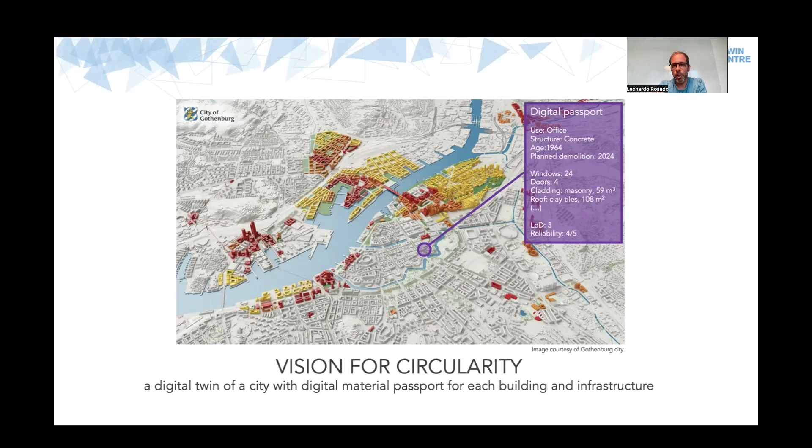We're trying to have a very centered systems perspective approach, so we can really try to go from a theoretical perspective where we look into as much information as we can, and then focus on some use cases, but then come back to this idea of trying to generalize what this vision should look like. So that's what I will try to go through today.

For us to go through that, what we needed first to do was to really try to understand what are the stakeholders involved in this process, what are the interests, and what are the data needs that we should gather in order to fulfill the stakeholders' needs for them to support the reuse and recycling of materials in this existing stock in the built environment in cities. So that was our first approach.

What we did there, we needed to map key variables associated with that and then combine them. We came up with this concept that we needed three main types of variables that are important. One is the phases of the building projects, which include also the end of life. We should also know what stakeholders are involved in which of these phases, and then what types of information they require to really support reuse and recycling in a more practical way.

So what we did then was to really start first by mapping out the project process. Again, nothing too special, but it was important for us to map this out. We combined it also with the way we need to handle materials, because we're talking about material passports and recycling and reuse, so it's quite important to do this.

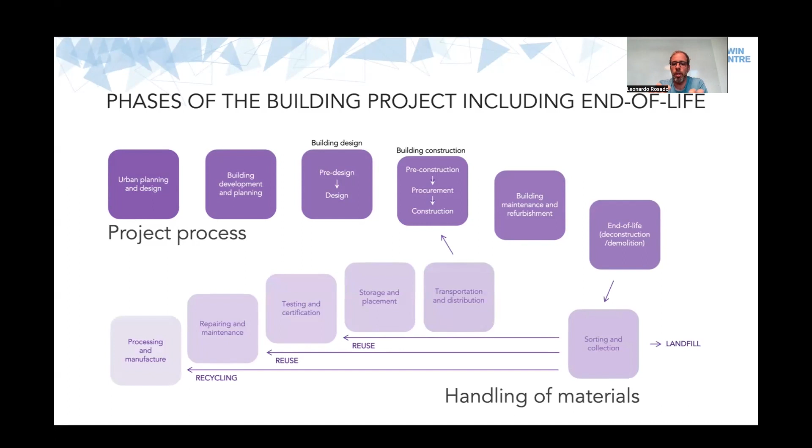We also mapped out the different types of flows and where different types of materials will end up if we reuse them or recycle them, or even if we send them to landfill. This gives an overview of all of this process, because afterwards we look into what kinds of stakeholders are involved in all of this process for recycling and reuse.

We did this very overarching work to really map out all of these connections and combinations between each of them. Once we have that, then we started looking into: okay, so we know the stakeholders, we know the phases, what requirements do they have?

Once we have this information, what we did next was to really try to understand, for each of these requirements, what kind of sub-requirements were needed, and then also tried to map out what type of methods and state-of-the-art approaches exist out there that could provide information to fulfill these requirements.

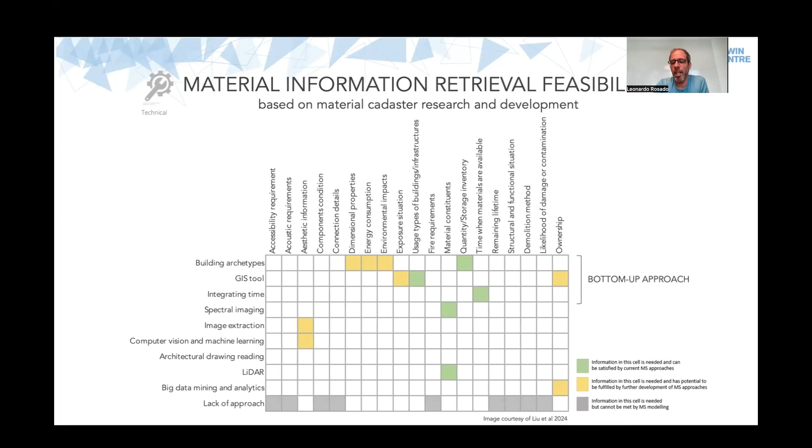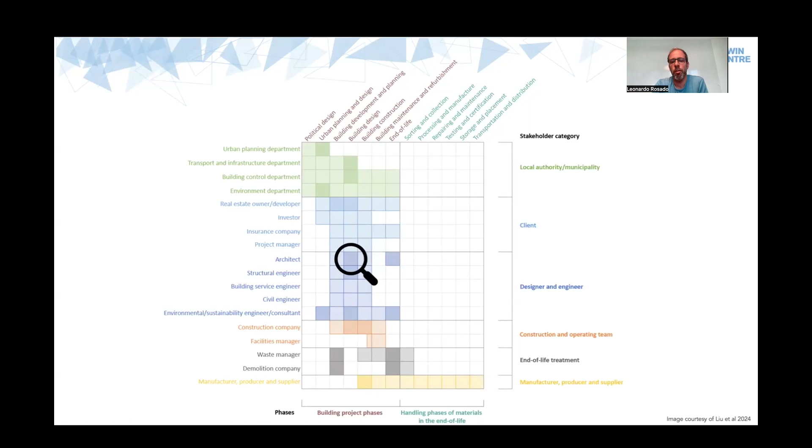So we did all of this and combined it with the previous matrix where we looked into each decision maker to see which information they require at different stages of the process. I'll give you an example of the architect so you can understand in more detail. We looked at the architect in the building design phase and all the requirements, to understand what information they need and what can be satisfied with approaches that exist today, in the near future, or cannot be approached at all.

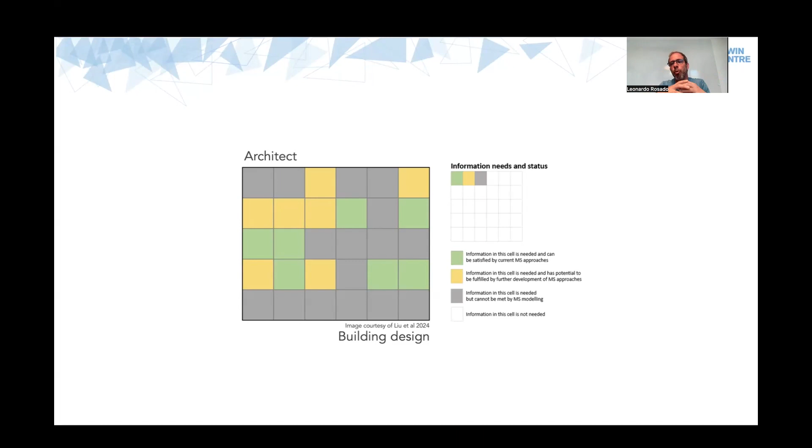So this is our overarching goal and our overarching work, to map out all of this information with a very generic approach to really understand what can be done.

So what we did next was dive into use cases, trying to understand in more practical terms what this means by developing user stories connected specifically to different stakeholders for different phases of the process.

In terms of use cases, we're looking into Gothenburg in Sweden, closely with Framtiden, where their ambition is to identify the supply and demand of recycled building materials and reusable elements from the existing stock, and also provide support to market actors to stimulate this market of reuse and recycling. We also have ongoing processes with Rennes in France and Nijmegen in the Netherlands, and we've lately added Vienna as a fourth case study.

So we are looking into these cases and trying to define what it is that they want in each of them, so we can depart from there.

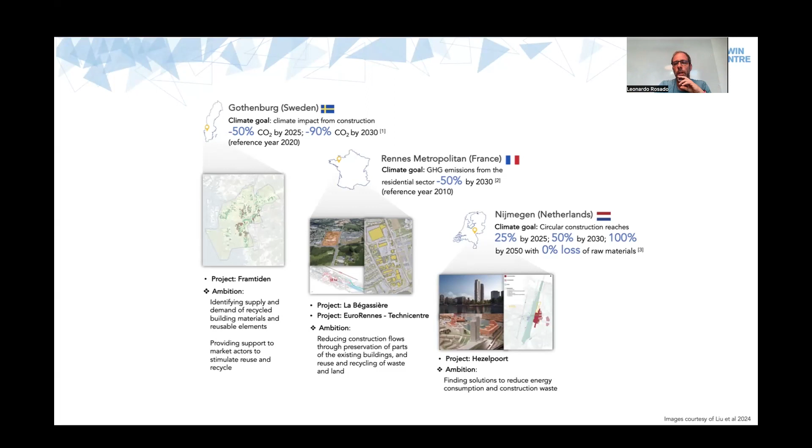Once we know the use case in Gothenburg, we started drafting user stories for different types of users and stakeholders, trying to connect with what they want to do, their responsibilities and tasks in more detail, to see if we can develop a tool useful for their daily practices.

We looked into several of these, specific for Gothenburg. I want to show you the example of the sustainability strategist. We drafted this together with Framtiden to really understand what they want out of the tool.

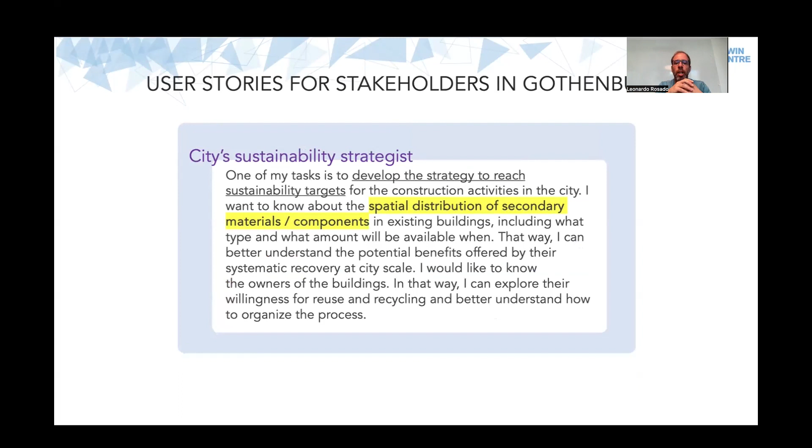Some of the things they were interested in: understanding the spatial distribution of secondary materials and components, knowing what type of components and materials we're talking about, what amount, and when they'll be available, and also who owns the building, so they can better address how to recycle and reuse.

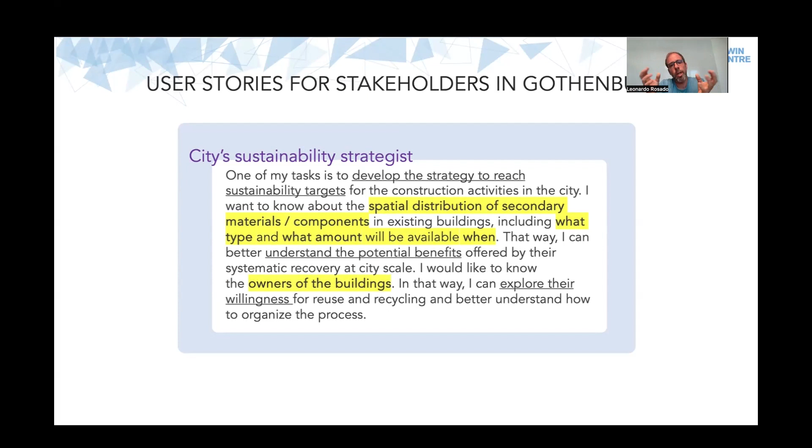So having this use case and these user stories, we can start understanding what we can do to develop a tool that is useful to apply in a practical context, in this case, in Gothenburg.

So what we have done so far in tool development was first to identify what data sources we were going to use in general. Again, this is very connected with resource cadastre information.

What we used for this tool was first to know the material intensity coefficients for building types, different types of buildings, multifamily buildings, single family houses, commercial buildings, industrial, educational, and so on, connected with the different elements in these buildings, the components, and also the materials.

This information we got from previous work at Chalmers by Paula Gontia, where he described this information for different archetypes of buildings across decades of construction in Sweden.

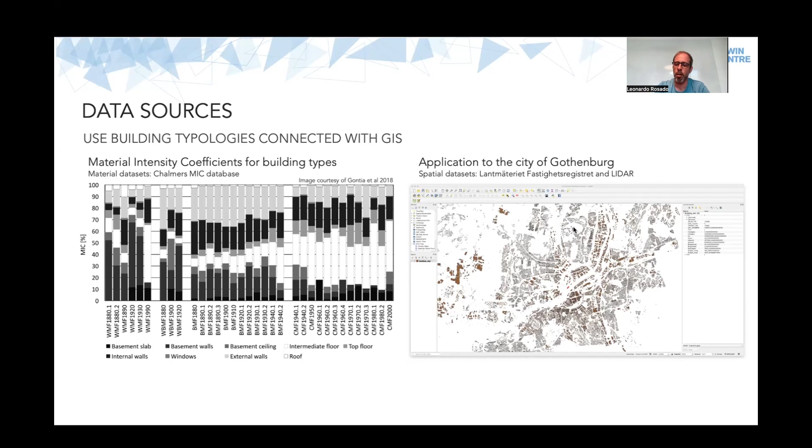Having that information for an average building per square meter of ground floor area, we applied it to the spatial information related to Gothenburg using the Lantmäteriet data and also LiDAR data to get information about the number of floors or the height. So that was the bulk of the information we used.

Then we started preparing the GIS data set. We assigned the types of buildings, the construction decade for each building, and the type of structure—if it's brick, concrete, or wooden—and added the information of the number of floors.

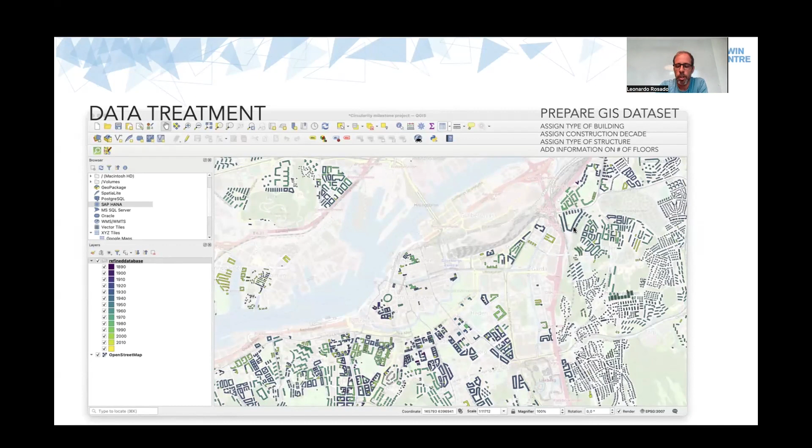After that, we continued into the details and added the material information associated with each building by looking into the amount of materials and elements and components that each archetype would have.

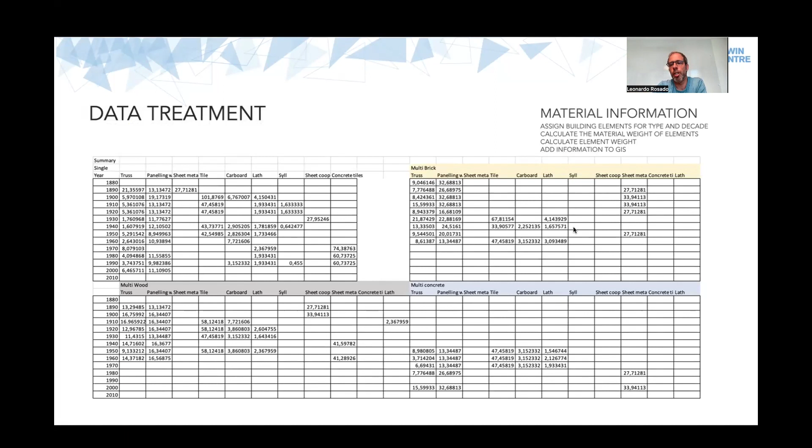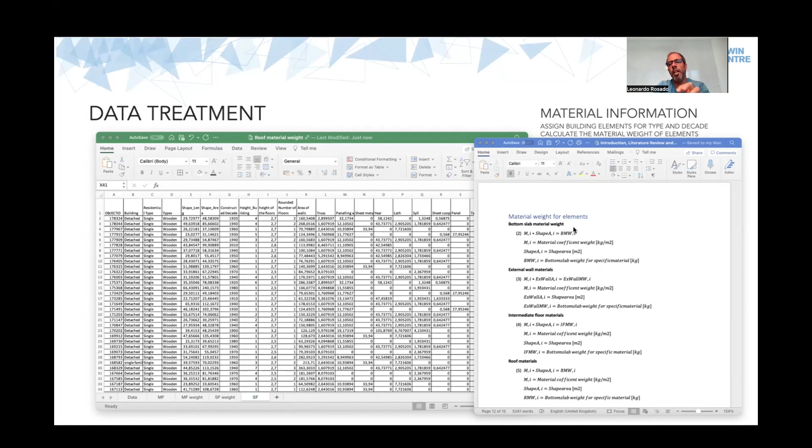This is another example. We assign the building elements for each type and each decade, and calculate the material weight of the elements using gross floor area per square meter, volumes, heights, densities and so on. So we come up with a list of all the materials, elements, and components in each of these buildings, and we could start mapping out different types of elements for different types of buildings.

Having that data set prepared, and combining it with the user stories we've created before, we started developing the tool, which is currently in the wireframing stage of development.

Once you choose, you go into the core of the tool. On the first screen we have the building information selection, where you start looking into the buildings as a whole and choose different types—residential, non-residential, multifamily, single family. So you have several layers there.

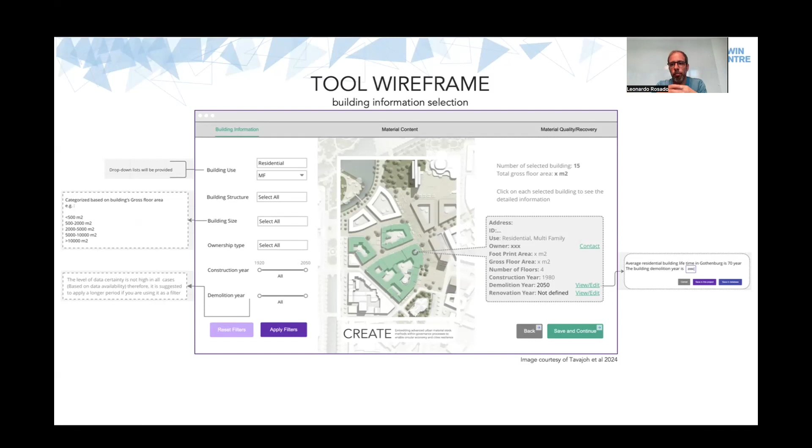Of course, you can also look into details for each building selected with your filters and get additional information about them. So this is the first screen where you can really dive into the information about the buildings.

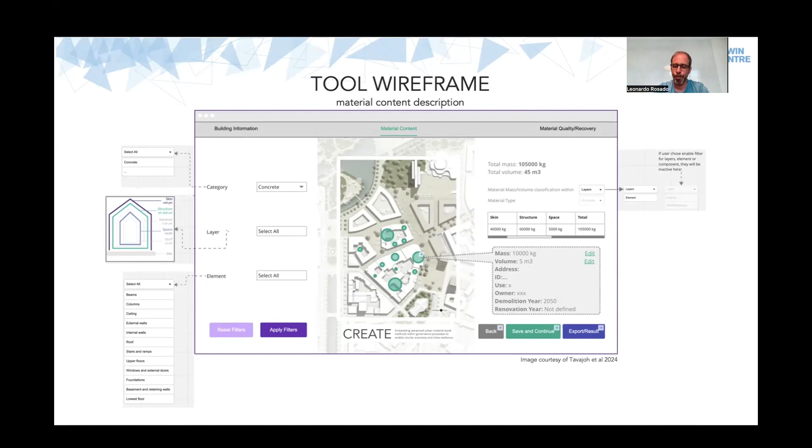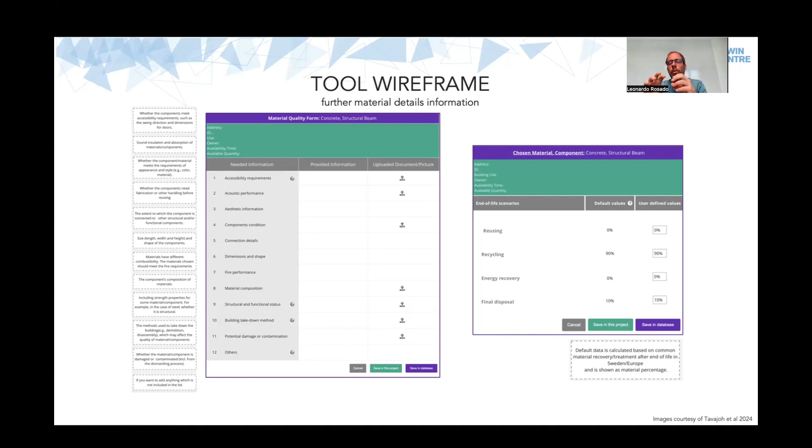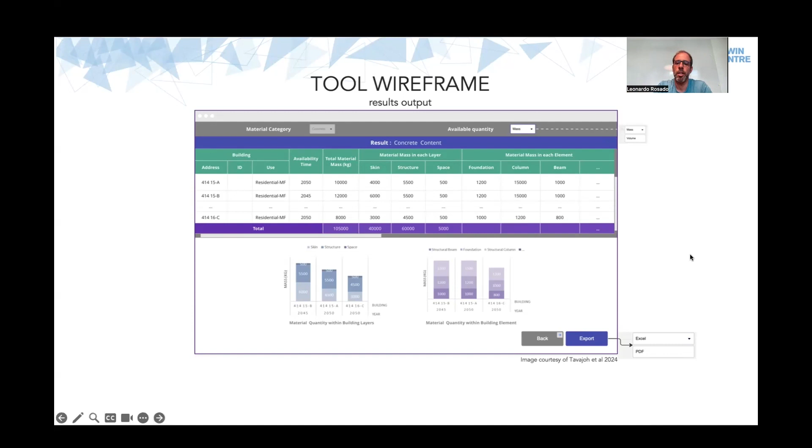Once we have this, we get output information from the model. For each defined area, we have information at the building level, and aggregated information per year in terms of material quantities within building layers and elements, associated with demolition periods defined for each building. You can look into specific details—just concrete, for example, just structural beams, or any other element—and also the scenarios for end of life.

So this is the tool we've been developing, and we're going to develop the software soon, continuing to improve it with more information. This brings us back to the idea of what we want with the digital tool, what the digital twin is, and how we structure our thinking about this process.

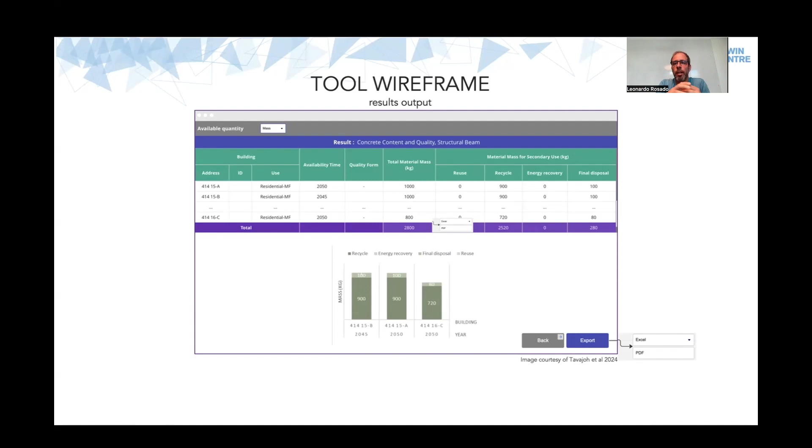I'd like to finish with a presentation on our idea of what the structure of a digital twin should look like, thinking about material passport information and how to characterize construction materials accumulated in our buildings and infrastructure—looking into what, where, how much, and how detailed it can become with the information and approaches we have today.

We came up with this idea: the first level of detail in a digital twin is the building level, using bottom-up stock modeling like we used, calculating material content per square meter of gross floor area, applying it to each archetype, and scaling up to a whole city.

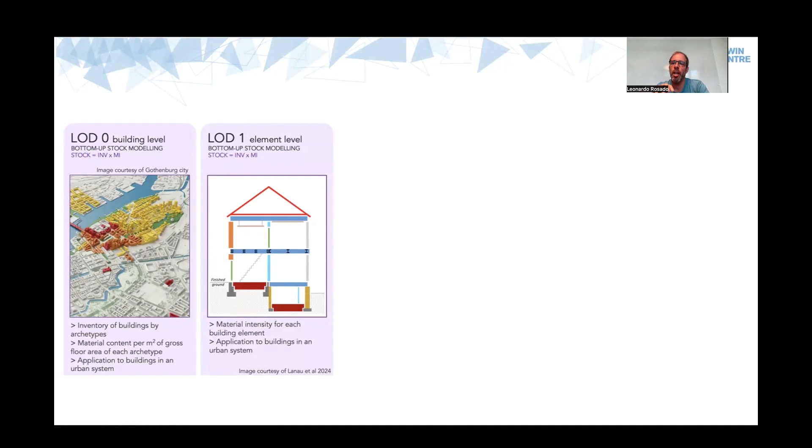Moving to a higher level of detail, we add information about elements, not just materials in the building. From there we can go further and add information for components. All these first levels of detail are based on average material types and quantities, so we're still doing a lot of modeling, extrapolation, and averaging of results.

To move further, we can look into parts of buildings and complement the information with artificial intelligence approaches—satellite imaging, aerial imaging, web crawling, computer vision, and so on—to add more information.

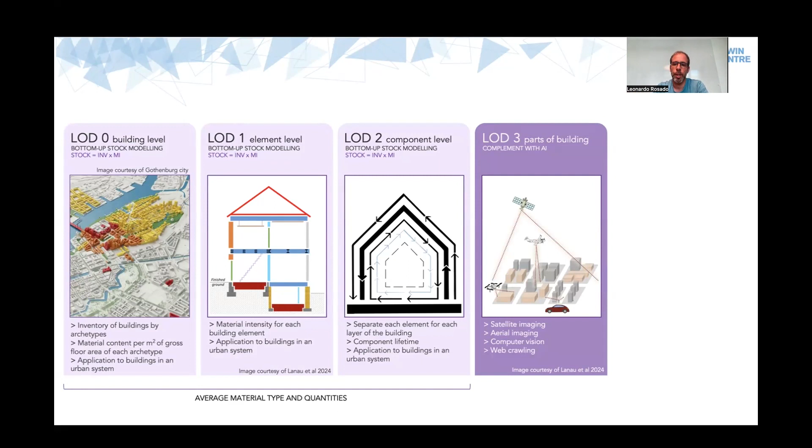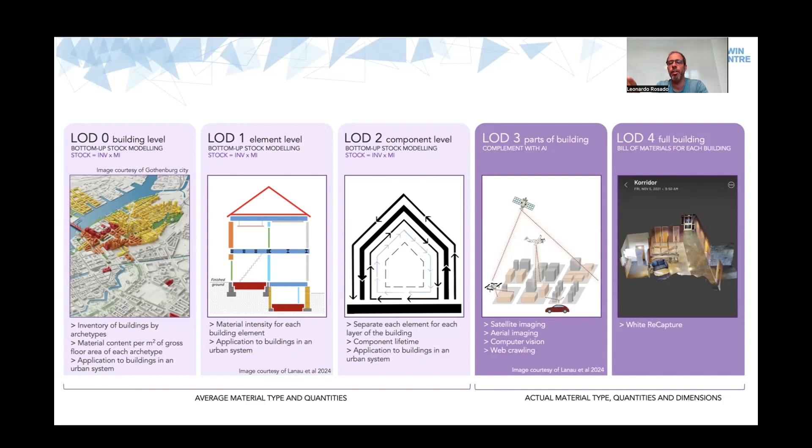Finally, ideally we should have a bill of materials for each building. There are projects and technologies today where you can actually start to characterize the building as a whole. At these two levels of detail, we're really talking about actual material types, quantities, and dimensions that truly exist.

I hope you had a good overview of what we've been doing here. There are a lot of open questions and things still to develop, but this gives you an overview. Thank you so much for your attention.